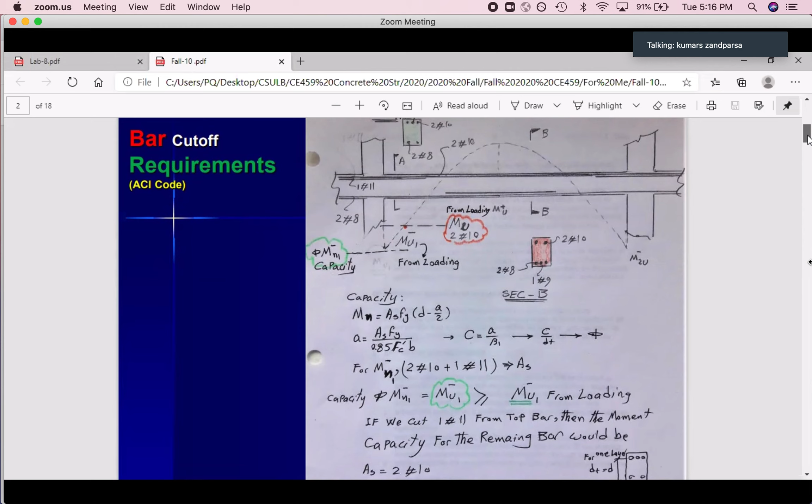So I want to cut this rebar. Which one? I want to cut number 11, that one extra rebar that I put here, I want to cut that because it's extra. So how can I find the location that I can cut that based on theory? If I cut that here, just assume that's the location that we can cut. This line is just right now based on, I assume that I am going to cut number 11, and this one is here. So how can I find this line?

This line is the moment capacity for the remaining rebar. Is that correct? Because this one is for two number 10 plus one number 11. I want to cut the number 11, so in this case I have just two number 10. Do the same as this, but your AS doesn't have this one, you have two number 10 only.

So in this case, you will get MU negative for two number 10. That's it, this line. This MU negative means that MN negative for two number 10, times phi, you will get the MU. These are the capacity. This capacity should be for two number 10. How to calculate that? For two number 10, calculate A, C, phi, then put this A in this equation, find MN. MN times phi will give us the MU for two number 10. That's the line for two number 10.

Based on the scale, if this one was 400 kip foot, and this one is for 300 foot kip, just based on the scale, you can draw this. You don't need actually to do it even by scale because we have to calculate the length, and you will learn how to calculate that. So I hope I made that clear.

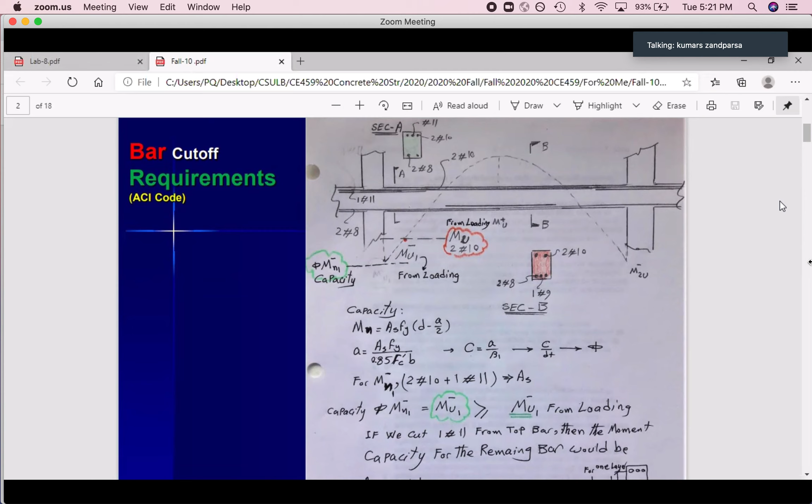So in this case, as you can see, we can calculate MU-1 from loading. As you can see, the moment capacity, yeah, is phi times this, is the ultimate moment capacity. I put this, look at this, that's the green one, this is the green one. This is phi MN, means MU. So MU from capacity must be greater than MU from loading. This is MU from loading, as you can see, this is MU. MU from capacity is more.

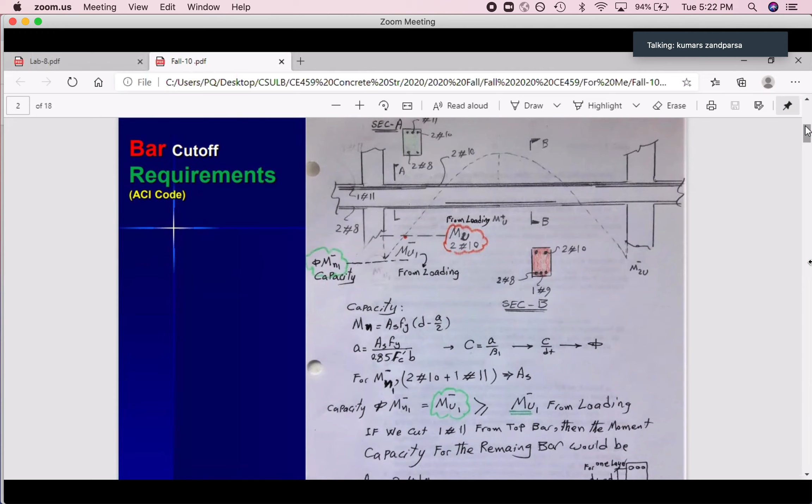So zero moment negative, maximum negative moment from loading, and that's your moment capacity negative from the material that we used. Yeah, that's it. Hopefully this is clear for you guys. I'm sure it's not, sometimes it's not that easy, but if you follow the stuff that I told you, hopefully it should be easy for you to understand and be able to solve the problem.

So then if we cut one number 11, as I mentioned, we have to find the moment capacity for the remaining of the bar, meaning two number 10. As you can see, for two number 10, I put this red line. That's how to calculate this. For two number 10, you know the AS. Go to this, find A, find C, C over DT. I showed everything here. This is one layer, so D is equal to DT, yeah, for the top bar, because tension is on the top for negative moment. So you can calculate phi, then find MN for two number 10, and with this A, then phi times MN will give you the remaining rebar moment capacity, negative moment capacity, like this red one.

That's the line. So it means that based on theory, at this point, I don't need number 11 because the moment is going down and the moment capacity is more than that moment. Just try to understand this diagram, this diagram is helping us. This is the moment capacity. Over here, the required moment is this one, less than this, so two number 10 is good. Over here is zero, no negative moment, and still I have two number 10. That side I have positive, so I don't need any negative moment rebar, but still I have that.

And for the positive moment, I should do the same based on the bottom rebar. So I'm going to cut one number 11, number 9. I have to find the MN for two number 8.

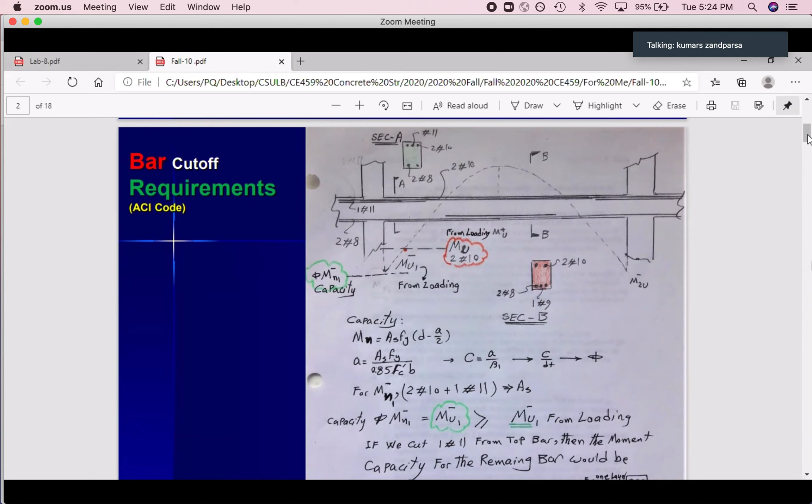So this point is a cutoff point for number 9 based on the theory, that side based on the theory. But are we going to cut at that point? No, the code will not allow us. There are some codes that we have to find, and then extend that a little bit. So this part, I put that together to make it a little clear.

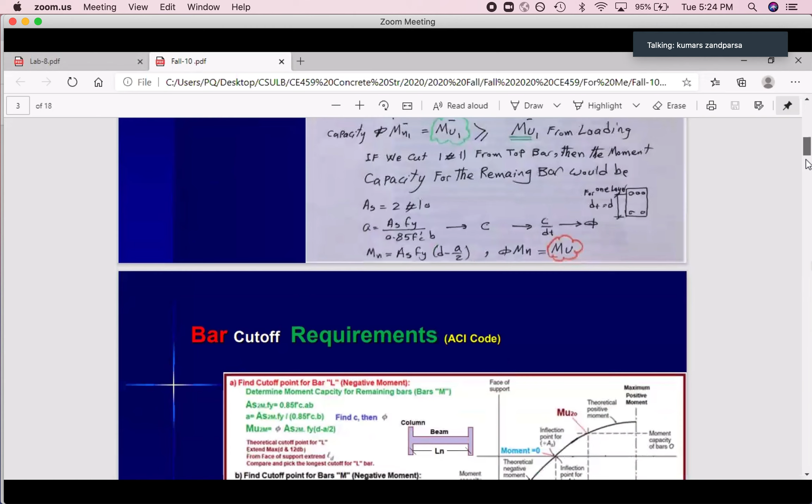And we will go after this to see the ACI rules for this actual cutoff point. Okay, back again to what we got from the previous slide.

I have a question regarding the last slide. Okay. When you say capacity, the capacity Mu is larger or equal to Mu from loading? That's correct. What's the difference between Mu and Mu from loading?

Look at this. Mu from loading, you calculate, for example, you have a simply supported beam with omega on top. So your Mu positive should be omega u L squared divided by 8. That's your Mu from loading. Omega means omega u, that's the loading, uniform load times L squared divided by 8. That's the moment caused by the loading.

And then we calculate this Mu based on phi Mn, and Mn based on the material. Look at this, there is no loading on this calculation. These are just the material. We call that capacity based on the material. So this is provided, that's required, based on the loading required. This is based on the material provided. Always provided must be greater than required.

Both of them are Mu, but one of them came from the loading, the other one is coming from the material. Did I give you the answer? Yes, sir. Okay, thank you.

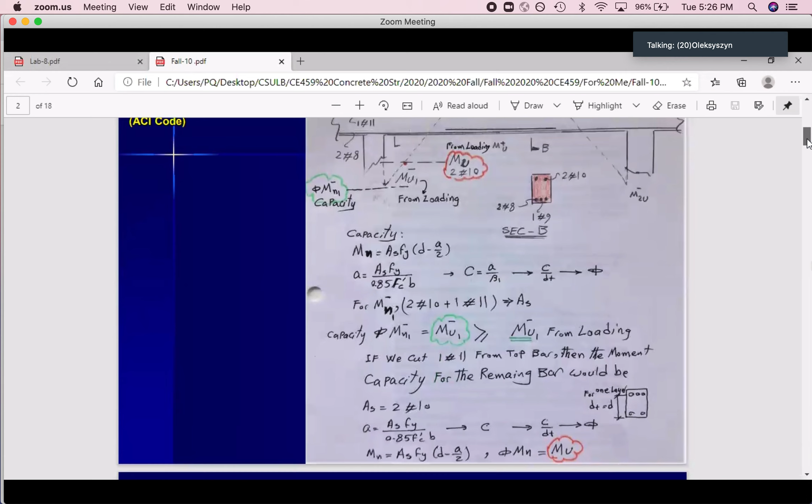You will be giving us the required moment capacity, correct? That's correct. This part, I will give you the moment diagram, so you have the information from the loading. Then you have to come up with the other stuff that you need based on the material. Clear?

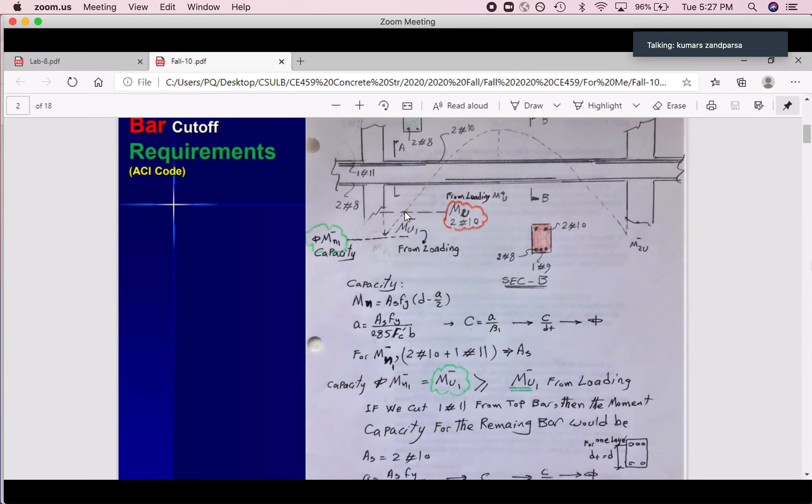Clear. Okay. Would we have to show on the line where that second Mu would come in, where we take out a bar? Yeah, you don't need that for the first one, I just show it to let you know that based on the rebar that you have, it should be more than or equal to the required negative moment. This one, you don't need that, but the second one, yes. And you can see right now in the example and the other parts I'm giving you how to come up with this and find this point. This point is important for us. Yeah, we will learn this.

Okay, this is the code. What's the code? It's a cutoff point for, look at this. This is exactly the same as the one that I showed you, but right now with that diagram I showed you, I think absorbing this is easier.

This is the moment diagram. Negative based on the loading, maximum positive based on the loading. Sometimes in different books they use negative on top, positive at the bottom. Doesn't matter. So the negative they can show on top, positive at the bottom, or negative at the bottom, positive on top, doesn't matter. The same actual regulation applies for negative and positive.

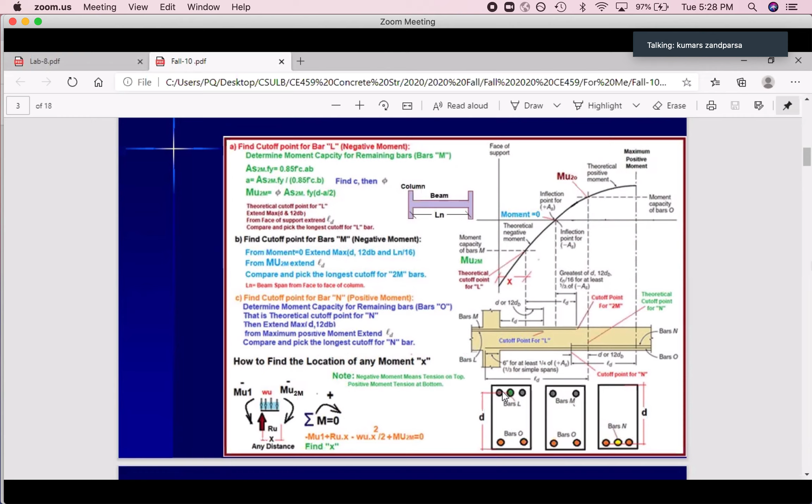So at first, at this side, I call this rebar L, as you can see, rebar L, cutoff point for rebar L. This L is here, this cross section is at this point. We have two number M bars. Look at this, this cross section is here. This cross section is here. That cross section is there. So each one is at the location that you can see.

Over here, you have three bars, bar M and bar L. Bar M, over here we cut this bar L, there is no bar L. For the bottom bar O, at the bottom we have two bar O, look at it, these are bar O, and bar O, still we have it. On top we don't have L because we cut that. Over here there is no top bar, there is no compression bar. We have three bars, bar N one at the middle, and two bar O. Yeah, that's the cross section.

So we are going to find the cutoff point for bar L at the negative side. That's the first part, finding the cutoff point for bar L. So what should we do?

We have to find the moment capacity based on the remaining rebar, meaning 2 bar M. Because remaining is 2 bar M, we cut the green part and the remaining is 2 bar M. So I wrote AS for 2M. Whatever we have, AS for that times Fy, calculate A, then find C, then find Phi, same as I mentioned before.

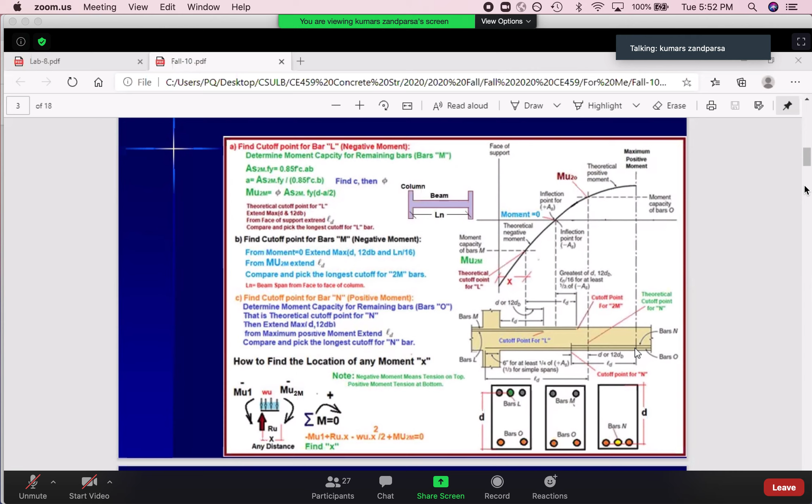So find the maximum and then cut at that point. This is the cutoff point for positive moment, for positive rebar. As you can see, almost the same regulation, except that when you're cutting all the rebar, it has 3 parts: D, 12dB, ln divided by 16. But when you're cutting 1 or 2, not the whole rebar, it's always D, 12dB, compared with LD. D, 12dB, compared with LD. That's it.

Any question? The second development length—for 2M, why does it start at X but not at the face of the column?

Look at this. Up to here we need 2M. So from here we need 2M. If we go here, we need 2M plus L. So you shouldn't compare that with this one. You should compare that with 2M, because 2M you are going to actually cut. So the start of the 2M is here.

Here you have 2M plus L. So always you go with the one that you cut. The rest of the rebar will go here. So if I cut another one here, you should consider that for the rest of the rebar as your base for the measurement. I hope I made that completely clear.

Is that clear now? Still a little bit. I'm not really clear.

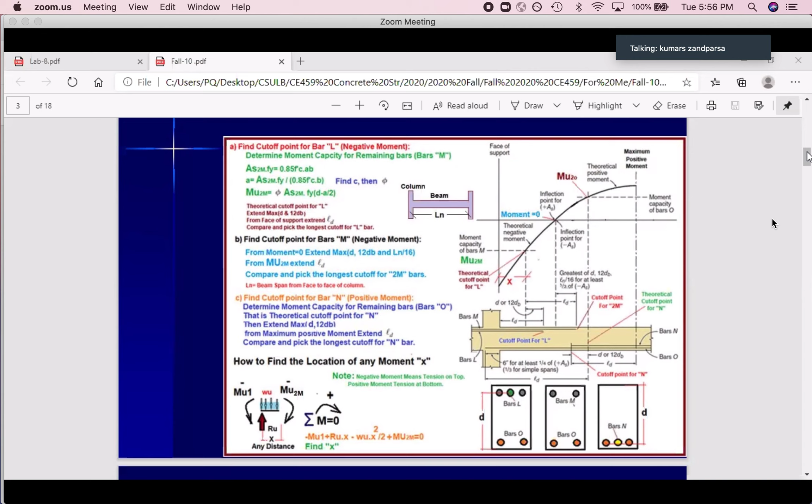I hope the rest aren't asking questions—it's not that hard, and they are following me. Since your friends are asking questions, maybe those are your questions as well, so that's good, kind of a teamwork.

Somebody asks a question, and a lot of other students have the same questions. So this part is the basis of ACI, whether you can cut the rebar or not. One of these conditions must exist if you can cut the bar. Those are important—I will go just with this one. The others are not that easy, so they're not part of what you really need. But if you have this case, that's good enough: the shear is not over 2/3 of the design strength, then you can cut the bar.

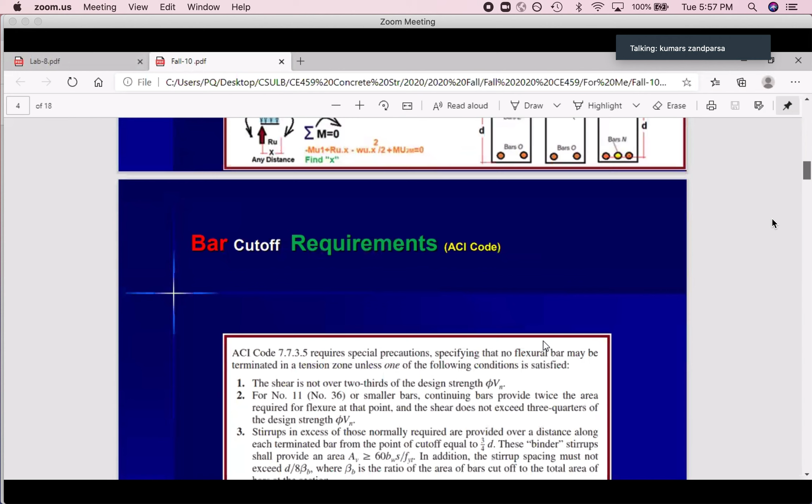So what does it mean? I want to cut this bar over here. Based on that code, you know the shear diagram. Let me plot the shear diagram over here—that's the shear diagram, just assume that.

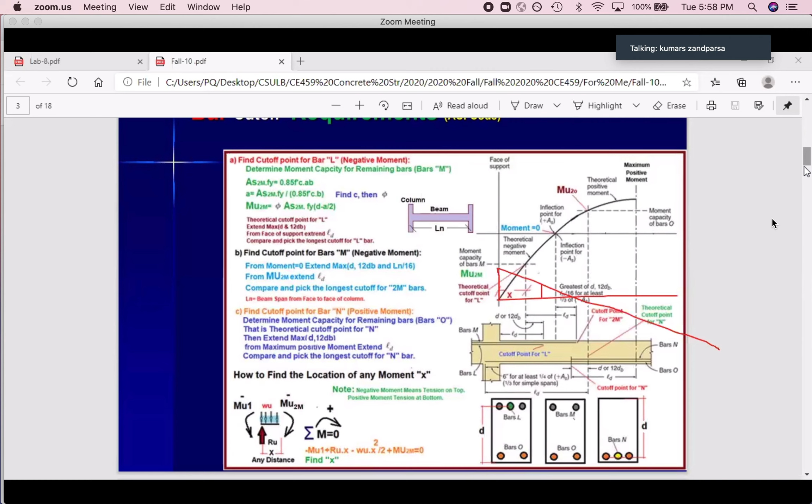Okay, shear at the end of here—look at this. This shear, that's your reaction RU. That's your shear at the cutoff point of L, for example. This shear shouldn't be—let me go to this page, I have to get out, otherwise I can't do that. The shear is not over 2/3 of the design strength phi-Vn.

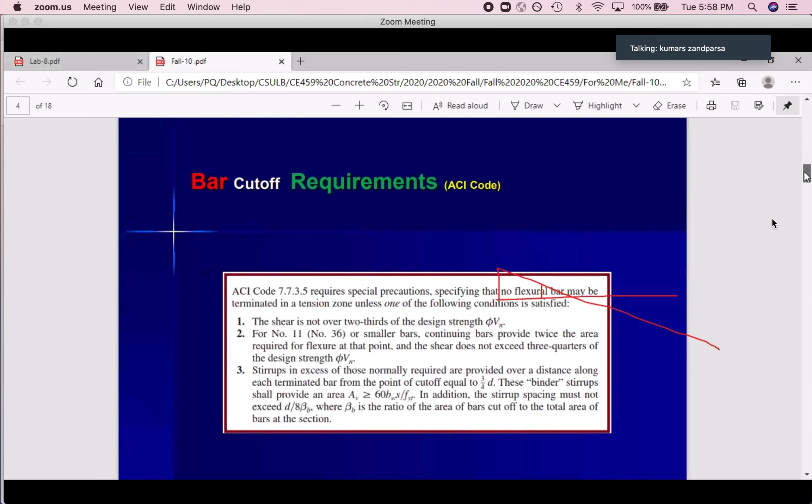What's phi-Vn? Phi-Vn was equal to phi-VS plus phi-VC. Phi-VC was from concrete, phi-VS was from stirrups. So this one should be less than 2/3 of phi-VC plus phi-VS. So calculate the shear capacity based on the spacing of the stirrups and VC, add them together, times phi, 2/3 of that, compare with this.

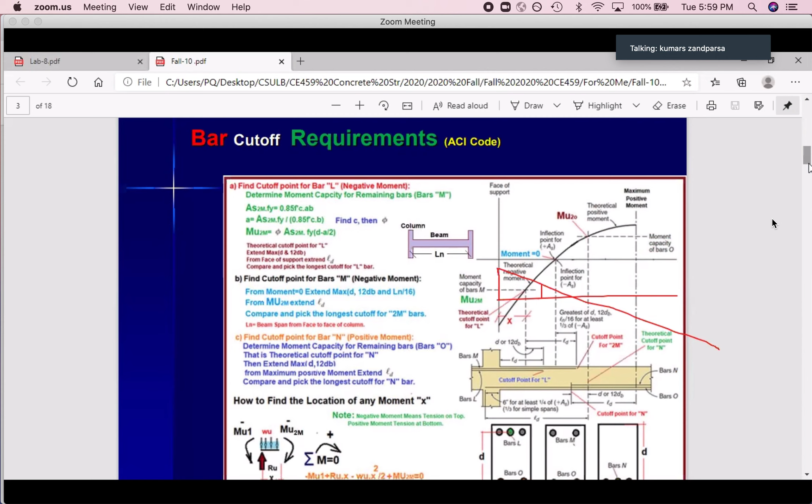If this one is less than that, you can cut this bar. If it's more than that, you cannot cut this bar here—maybe you can cut that here. So that's another thing. There is another regulation here as well, so just pay attention to this.

I'm not going to actually give that in the exam. I'm not going to ask you to check this one because you have to go through the shear diagram and find all that stuff. I will consider that part is...

Hopefully you know that, because it's structural analysis to go through all that shear and others. So just remember, and because of that, I put this in a box for you guys for the future. Whenever you want to find the cutoff point, just remember that there is some code, come to this slide or the book or ACI and find it. Remember, 50% of your knowledge is to know where you can find the stuff that you need. That's 50% of your knowledge. It means you don't need to remember everything, to memorize everything.

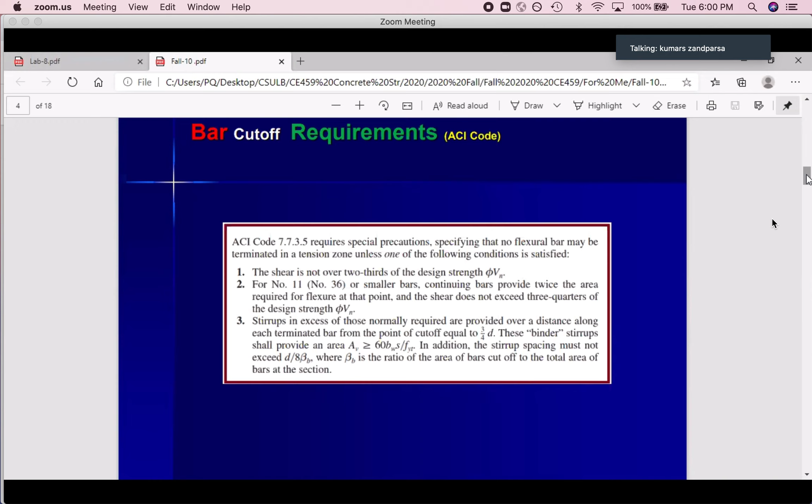We can't do that. But you can remember that there is something in ACI or somewhere that has some requirement for cutoff point. That's your knowledge. Go to that part and find it and read it. Then the next day, forget it. Whenever you need it, do the same again. Remember that there is something. Go to the source, and then that's your knowledge. 50% of the knowledge is to know where you can find the answer. The rest of that 50% is your brain. You can remember that. Okay.

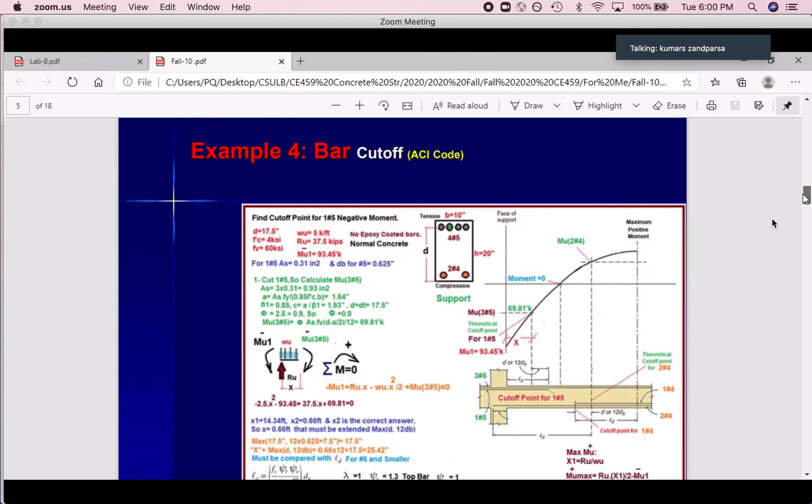Let's go and do an example. I think with this example, you can see the answers. Hopefully.

Find the cutoff point for one number 5 negative bar. Look at this. We have 4 number 5, and I want to cut one of them. I want to go through this completely and learn this completely. For the positive moment cutoff point, it's not as easy as this one. If you can learn this, I'm happy with you guys.

In other words, for the positive moment, I'm not going to give you any question. I just want to show you so that you learn and get a good grade. So just try to completely understand this. You can do this as well, but this one for sure you need, for sure.

Okay, I'm going to cut one number 5 out of 4. So what should I do? I know everything. Look at this. I know mu1 negative. I know RU. Look at this. mu1 negative 93 point. I know RU reaction. I know wu on the beam. I know D, 17.5, F prime C, FY. Everything that we need. No epoxy coated bar.

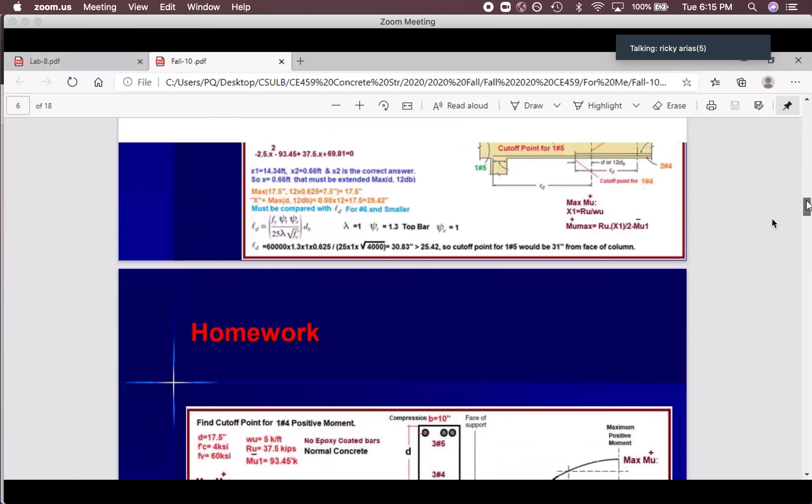So the cutoff point here should be at 31 inches from face of the column. Is that clear? No answer. I hope that's a good answer. Professor, I have a question. Sure. I'm still kind of unsure what X2 is.

X2, look at this, is for the other, you have two answers. Forget about what I mentioned. You have two answers, right? One of them is 14 feet, will go to the other side of the positive moment. Look at this, will go to the other side of the positive moment. That's wrong, because on the other side of the positive moment, you don't need negative moment. Negative moment up to here should be 0.

I think with this one, for sure, you can get it fast. So if something is on the other side, it will go to the positive moment. That's wrong, stop it, you don't need that. Go with the one that is on the negative side, because you are finding this X should be between here and here, that's it. If it passes there, it's wrong, it's not your answer. It's not the answer that you are looking for. Is that clear? Now, is that clear? I want to make sure that you got it and I gave you the answer that you want.

Okay, yeah, it makes sense. Because from this equation, the negative 2.5x squared, you get 2x, right? That's correct, you get 14 and the other point. So this one will pass the positive moment, so it's not the answer. Okay, that was my question. It should be inside the negative moment. Okay, that makes sense, thank you.

So Professor, can you repeat the last part, before that question, when we compare it to the LD? Look at this, we calculated that X from here, X plus maximum of those two, 25.42. And we calculated LD for number 5, 30.83. Maximum of these two, so 30.83 is more than that, you should go with the maximum of these two. X plus that, compare that with LD, go with the maximum. Between these two, this one is the maximum. We will go with 31 inches from face of the column. That's the final cutoff point for number 5.

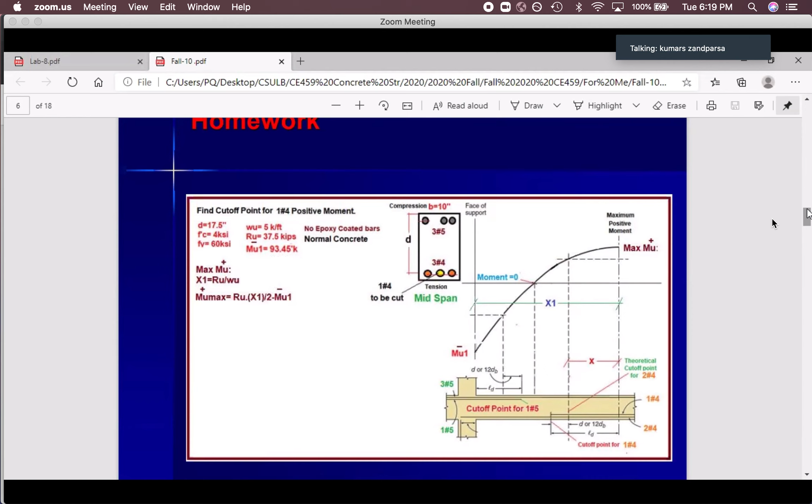So, homework - actually, I'm going to change that. This is for positive moment, so it will take a long time. You have to remember everything from structural analysis to find the location of maximum moment, then find a lot of stuff that isn't part of this class, so I'm not going to spend time on that. We have to cover reinforced concrete design. If you want to do that, you're welcome to. I put some notes for you guys, you can see them over here, but it's up to you whether you want to do that or not.

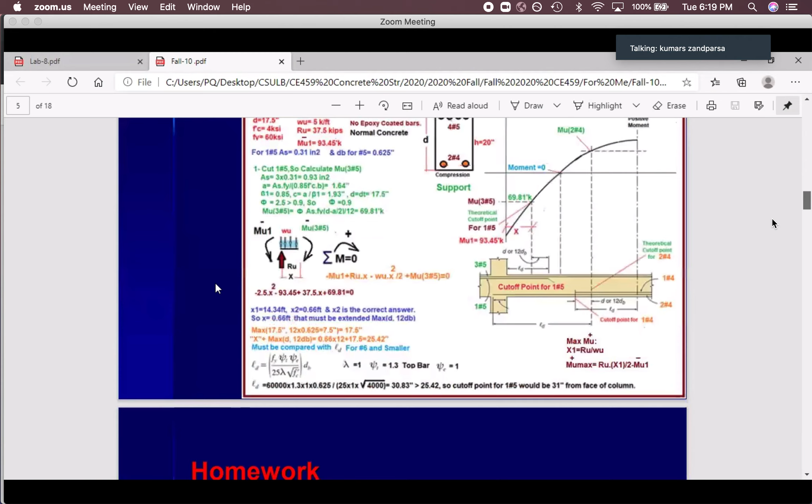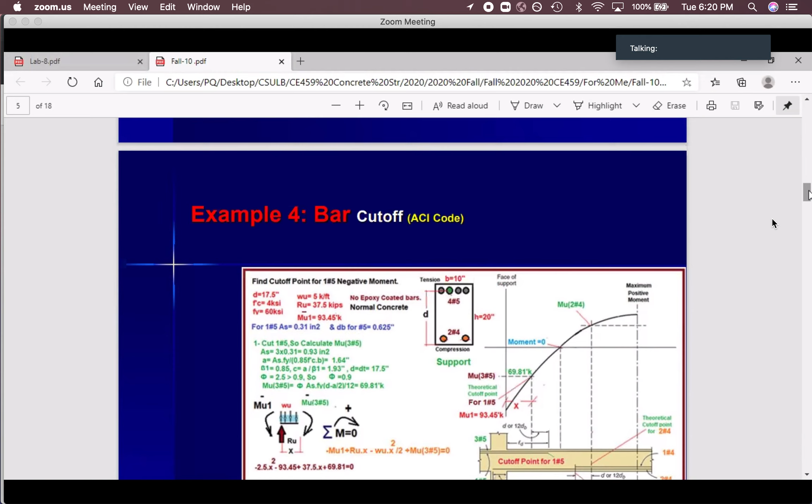But my question is, for this case, just find the cutoff point for two number 5 negative bars. We want to cut 2 of them, not one by one. I want to cut 2 number 5 out of these 4. Do the same as this one: find the cutoff point for 2 number 5. That's your homework, Professor? Yes.

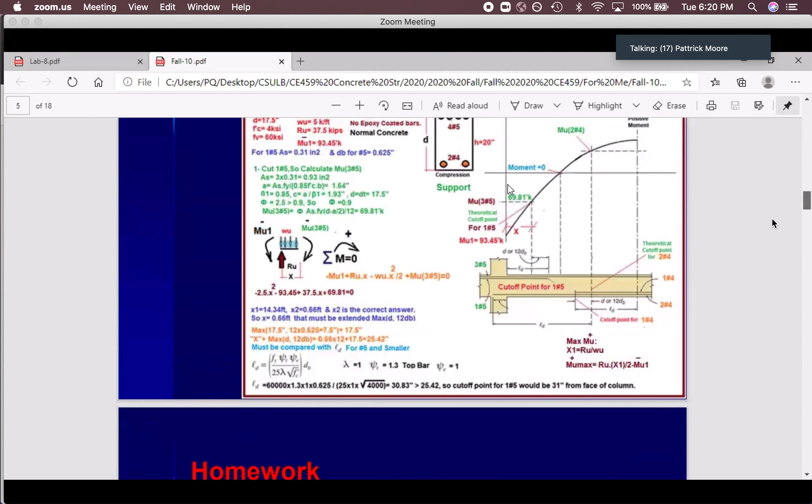So in this problem where we had to find the cutoff point for one number 5, would that mean our As would be a different value than what it was? That's correct, because you are going to cut 1, your remaining bars should be 2 number 5 instead of 3 number 5. So As would be 0.62 inches squared? That's correct, that's for the remaining bar. Okay, and we just basically do the same thing, we'll just get a different...

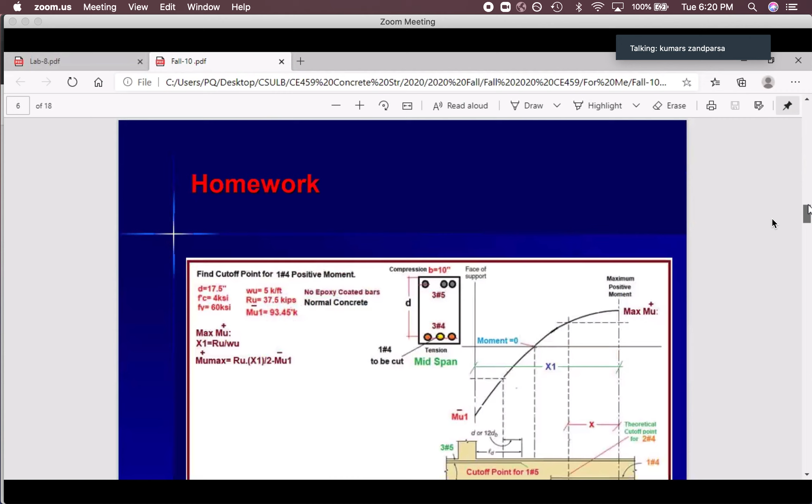Exactly, do the same. I want you to repeat this, please - solve this first, make sure you understand it, then go after that. Good. So please forget about this homework, this is not your homework. Do that one - just the cutoff point for 2 number 5 on top. That's it.

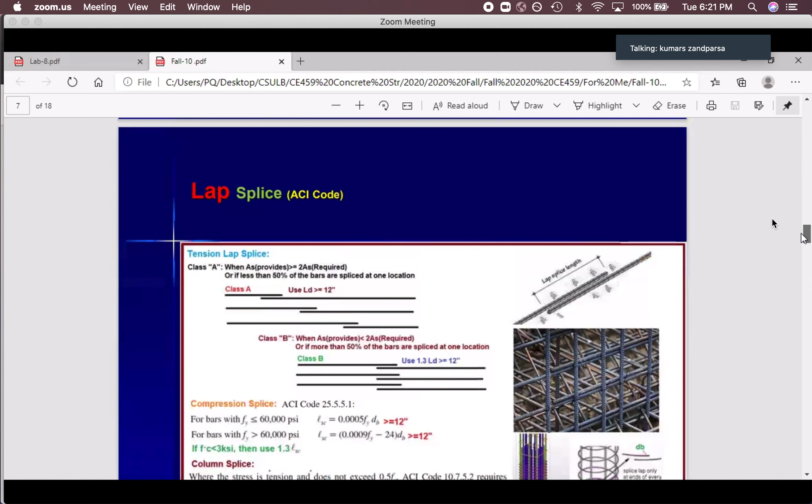Then another thing we should know is lap splice. You need lap splice a lot, you need this a lot, this is very important. We have two types of lap splice.

What's a lap splice? Whenever you have rebar, the length of the rebar is limited. If you want to continue that, you have to put a lap. Sometimes you're not using lap, we're connecting them with something else - I'm covering that in the lab. In this class, we're going with just lap splice, in the column, or whenever you have a long beam, say a 200 foot beam. All the regular rebar are 60 feet, so you go 60 and then it's done, then another 60, then another 60 to get to 200 feet.

So you have two options. Imagine you have 3 rebars, or you have a mat with a lot of rebar - I'll go with few. If you're starting from one point and just lap them at one location, all of them at one location - the splice length means you put them on top of each other, or adjacent to each other, and tie them together. That's the meaning of lap, that's a lap splice length.

So if you're doing something like this, you need to find LD for one of the rebars. What's LD? Based on the straight bar development length, if it's epoxy coated, top bars, all that stuff.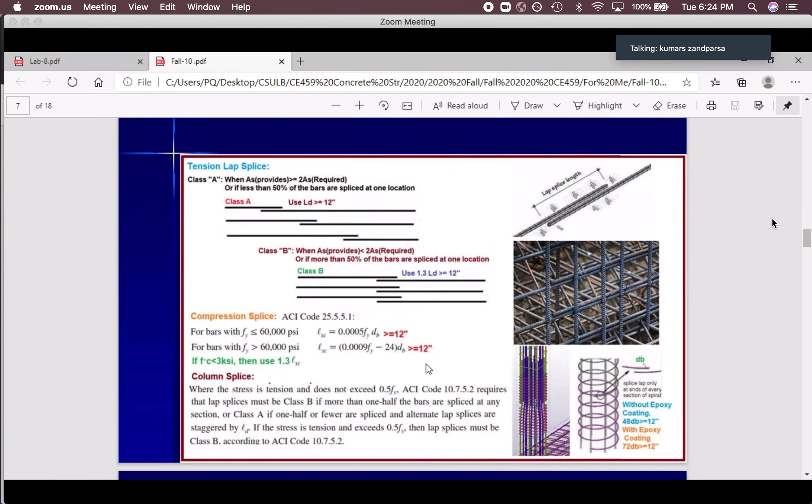You can use that for column tension, and for the spiral, I wrote this stuff here. You don't need to remember it, you need 48 times dB. You have to put them on top of each other and then continue for the spiral. If it's epoxy coated, it's 72 times the diameter of the spiral bar, not the main bar. The main important part is here - you need this in the field a lot, so please pay attention and take notes.

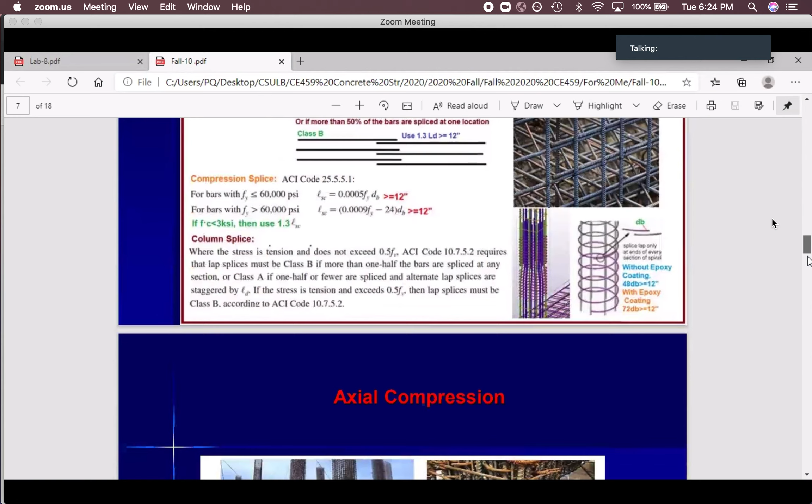So we are done with that part. We are done, and that's the end of what's covered on your exam. From this part on is not part of your exam. Any question on the lap splice?

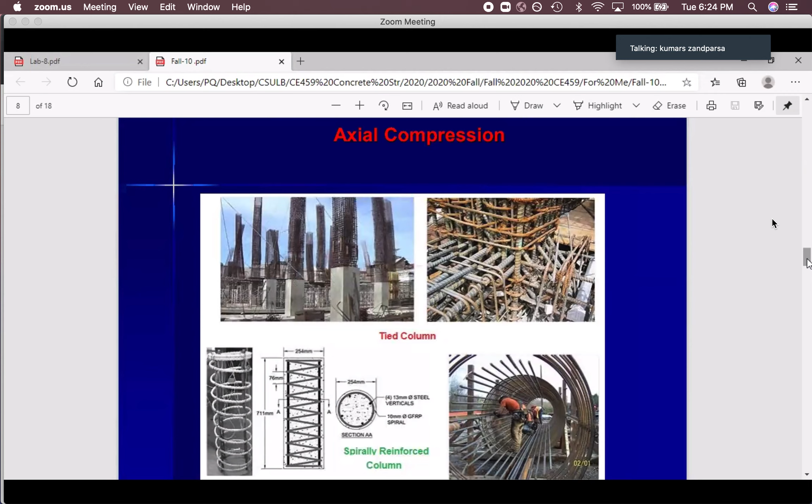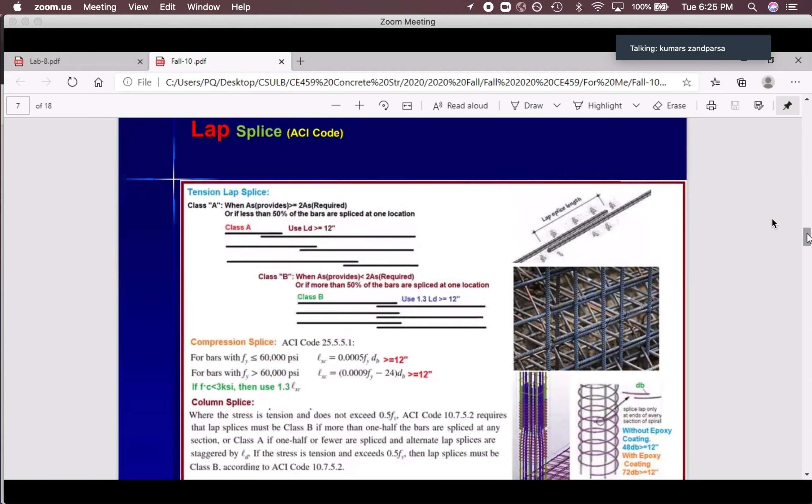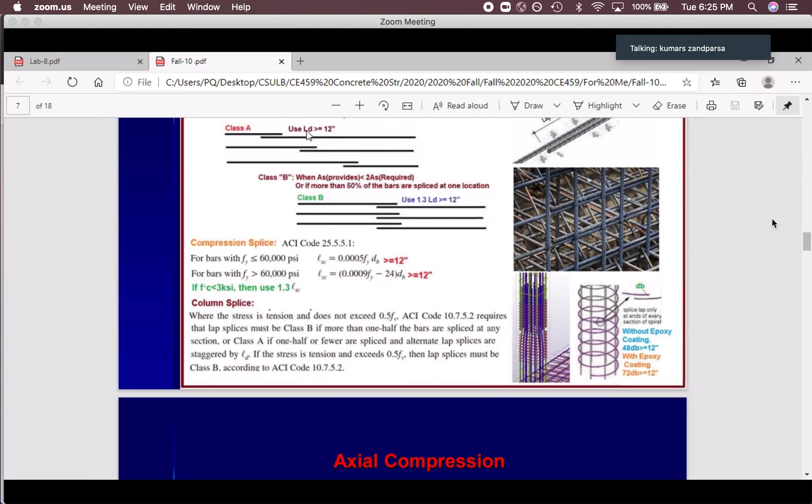A bit of that will be covered on the exam, it might be, but you should know the logic. If I ask you: we have class B splice, number 8, calculate the development length, calculate the length of the splice. What about epoxy coating for a column? If it's epoxy coated, it doesn't matter here - it will act on the LD. Remember, LD has that epoxy coat factor, with epoxy coating or without. You don't need to consider that here, just find LD times 1.3 or without any factor. Is that clear? Thank you.

So axial compression means columns. We have round columns or square columns. I showed some pictures. So far you're familiar with all this stuff.

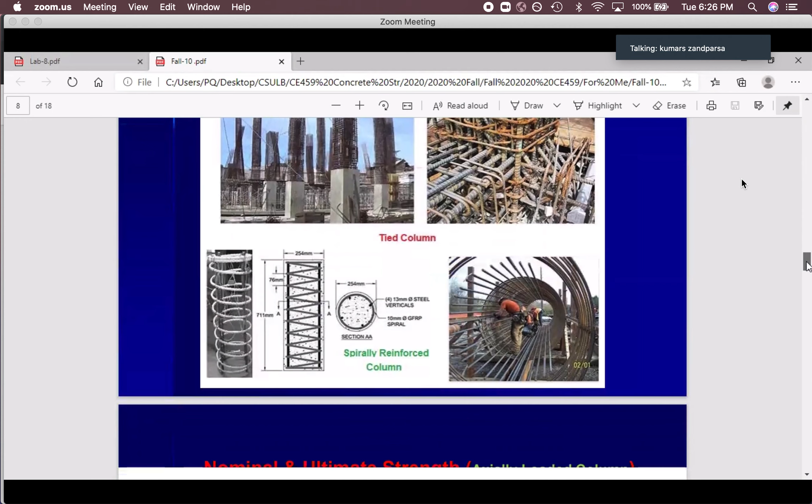As you can see, beams, all these tie bars - look at this, how many tie bars do we have? It's hard to install these sometimes, a lot of rebar, and then we have to make sure the concrete can get in. Otherwise, at the end, you will get a cavity that nobody can see, but in an earthquake, the earthquake can see those. We cannot, but earthquake can. We must do something so we can see the problem before the earthquake finds it. When the earthquake finds the problem, that's the end of that structure. If we find it, we can fix it. Okay, so these are just some pictures.

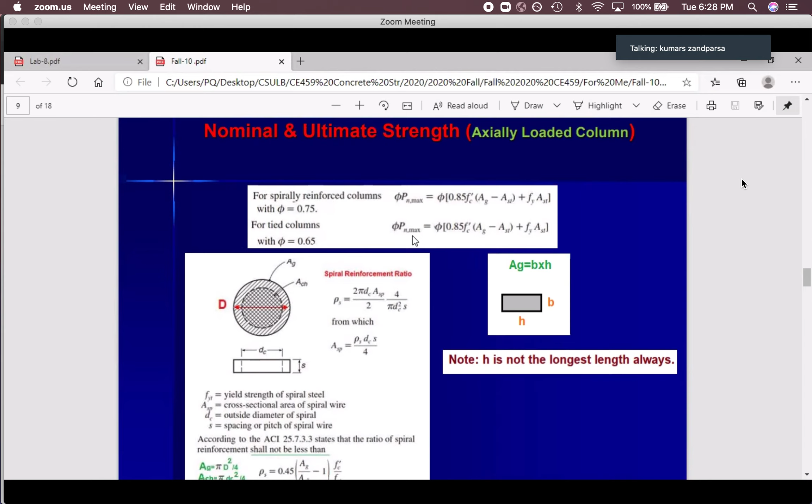So these are the equations, the same. If you are using spiral reinforcement, your phi is 0.75. If you are using tie bars, your phi is 0.65. That's the thing that we actually know from the start. Forget about this part.

This is just part of your knowledge for spirally. Spirally is not that you actually need them a lot. Sometimes, in some structures, those are not actually strong enough for earthquake, and the rebar, you need more rebar. In column, when I go to the chart, I will talk about this stuff more.

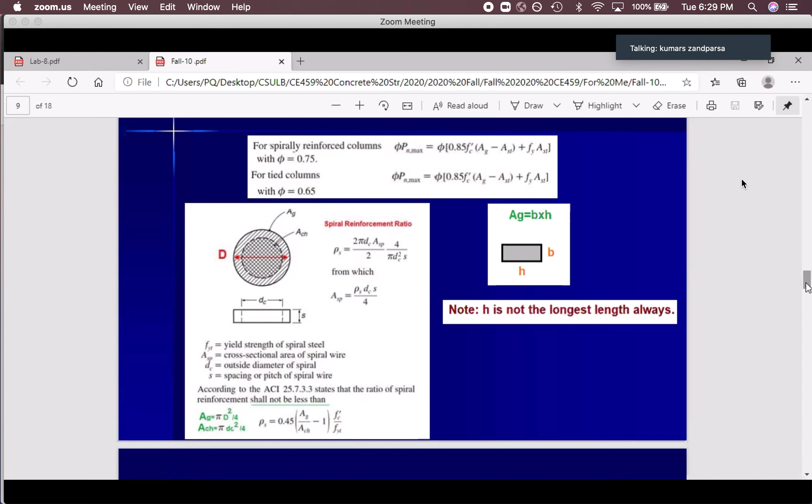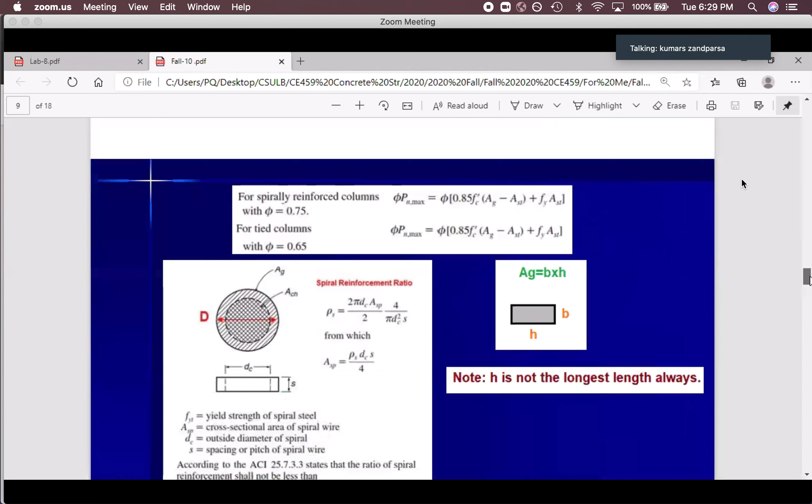So this is the only part from this slide, and you can understand concrete strength plus steel strength. I consider that steel strength, we are not going to consider that twice because we consider the whole area, but some part of that is rebar area. We deduct that. Sometimes they are not deducting that even. If the rebar is not that big and the size of the column is big, you don't need to consider that part. But this is the equation that you can always use.

And transverse rebar reinforcement, we call that tie bar for the columns. Tie bars, okay. If you have just 4, that's it. If you have a spacing between the rebar less than 6 inch, every other one can be at the corner of each corner of the tie bar. If it's greater than 6 inch spacing, you have 8 inch, 8 inch, 8 inch, 8 inch, so each one must be at the corner of the tie bar. So we have one closed tie bar, and then just single tie bars, single tie.

Look at this, it should be 135 both sides. The confined area of the concrete inside, the rest in earthquake we will lose it. This cover after huge earthquake, it will be gone, we don't have it. So this tail at 90 degree should be on the air, and it cannot hold like the other side that went inside the concrete, which will stay in because of the tie bars. But installation is not easy. Because of that, code will help us go with 135 from this side. Look at this, 135 means 45 from the other side, 135, and the other side 90 degree. It's easy to install: go here, install this, pull it back, push it in. That's it. If both sides are 135, you cannot install them.

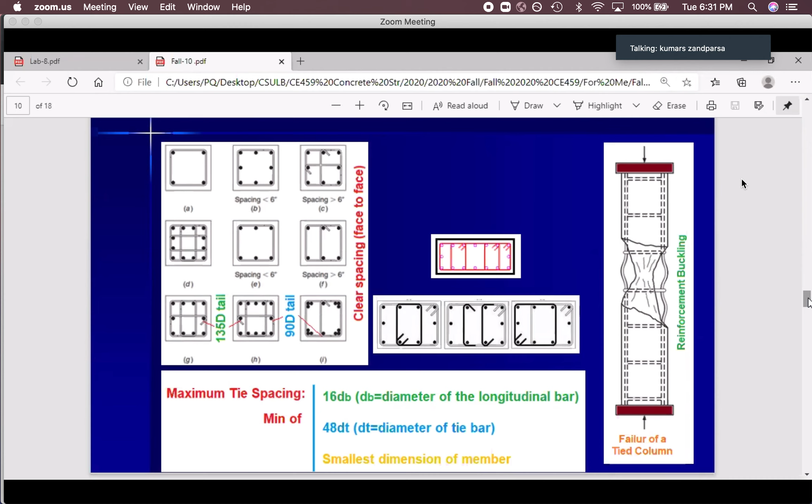You, as a designer or as an inspector, can follow this stuff, and those are very important in earthquake, and it can change a lot in a major earthquake. If we lose this part, the rebar can buckle, so the tie bars can stop this buckling. If the tie bars are too far apart and they didn't install them correctly, then you will lose the confined area. Look at this, we lost the concrete inside. If you lose it, you will lose the column. If you lose the cover outside after a huge earthquake and the rest stays intact, you got it.

The column could tolerate the lateral earthquake, and it should be okay. So these are the rules for every other one, and I showed that you can go with single. Look at this: if you have two on this side, 90 degree here on one layer, 135, 90 on the top layer, 90 degree here, 135 here, 90 here. You have to just change them in the row and in the height. You must do that.

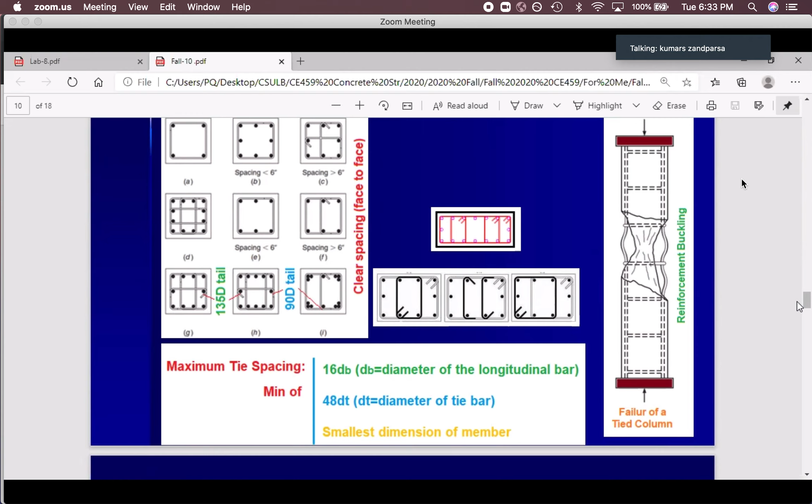What's the tie bar spacing? This is the maximum tie bar spacing, so you shouldn't go more than this, less than this you can. It should be the minimum of: 16 times the diameter of the main bar, 48 times the diameter of the tie bar, or the smallest size of the column. So you have 12 inch, 30 inch, 12 inch, so this one is 12. Then calculate them, the minimum of these three is your maximum spacing. Maximum, you can go less than this, not more than that. Any question on that?

Okay, so far I gave you compression only. If we have moment, then what can we do? Not that hard, it's very easy. Column up to here is easy. With earthquake and slender column, then you have to do something extra, but otherwise it should be very easy.

That's the elevation view, I cut the column. Column is high to the footing or whatever. We have point load plus moment. So I can show this as an eccentric load like P, and this arm should be M divided by P, so E times P will give you moment. You can transfer this to here, and E times P, your moment, will give you the same as this.

You can show it like this or like that, they are the same. Pn is the nominal axial load capacity with this eccentricity. These are the rebar. If I have moment up top, just remember B. B is always B in this case. What's B? B is the side of the column perpendicular to the eccentricity. The other side is H. Doesn't matter if it's bigger or smaller. Always B must be perpendicular to E.

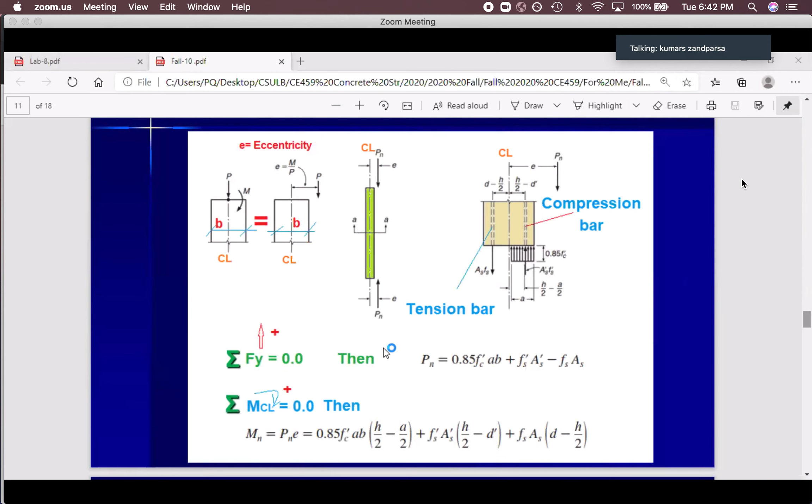If you follow this, you can work through the rest yourself. So we have Pn and Mn. Those let you find the capacity, moment capacity and axial load capacity, at any location, and these come from the beam.

Based on distance d prime, d, and epsilon, that's the strain diagram. Epsilon u is the strain for the concrete in compression. Epsilon prime s, from here to here, is the strain in the compression bar. And on the rebar side, that's epsilon s, the tension rebar strain.

The relation between all of these is not new, it's exactly from the beam. We know this from the beam. So whenever epsilon for the concrete reaches epsilon u, meaning 0.003, and epsilon s for tension equals epsilon y, we call that balanced failure. It means the concrete and the bar reach yield at the same time.

We call that balance. So C, which we can calculate from any of these equations at that point, should be CB. So instead of epsilon S in that equation, if I change that with epsilon y and rewrite it based on C, that's the equation. I can call that CB, the balance point, when epsilon C equals epsilon U and epsilon S equals epsilon Y.

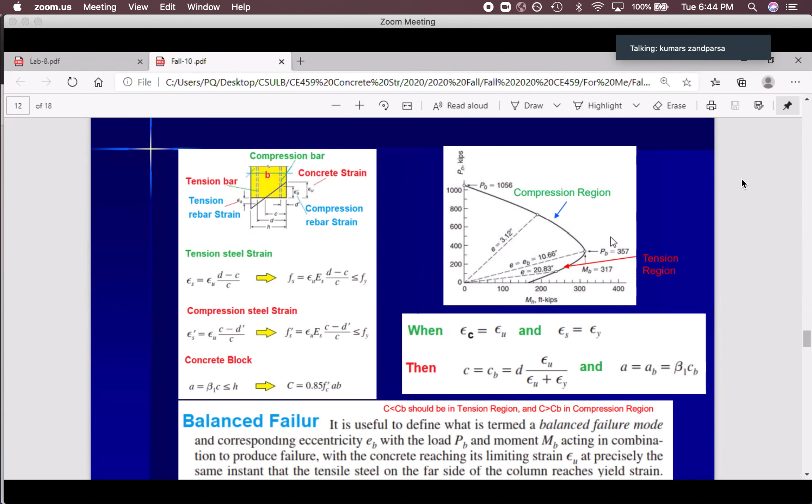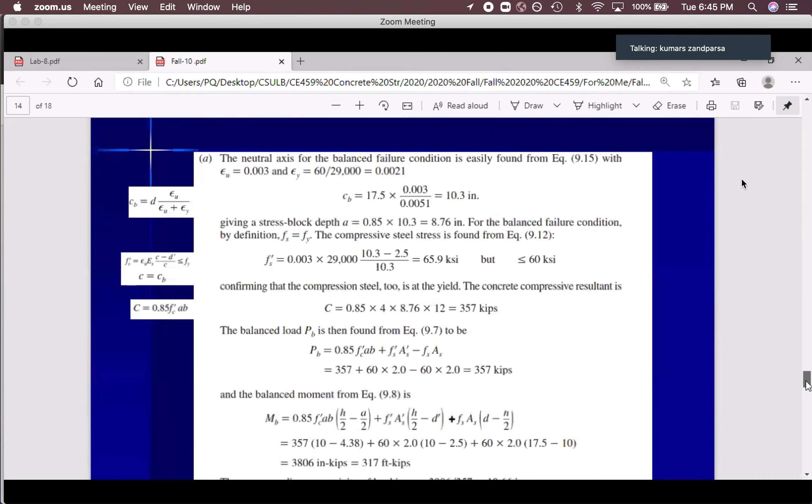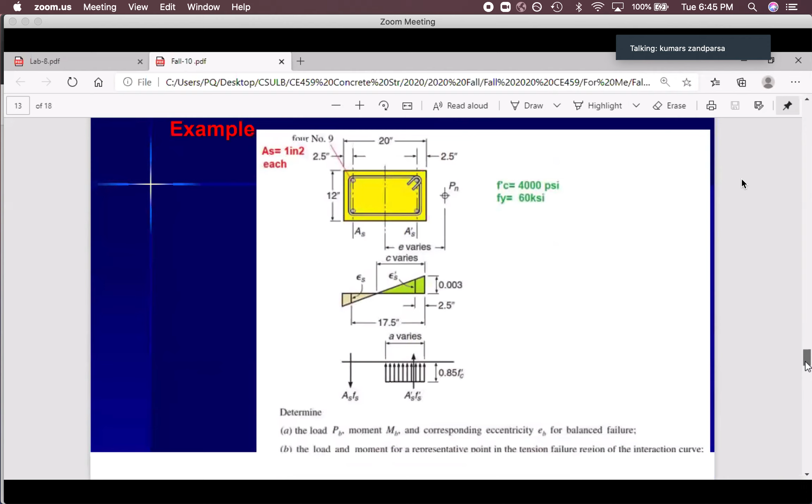That's the diagram. Later I will go through this a lot, so you will learn how to calculate this. This is an example, but I think it's a little late for this one. I think we'll go through this next week before the exam. We'll have a short class and then our exam, so I'll cover this part in that class.